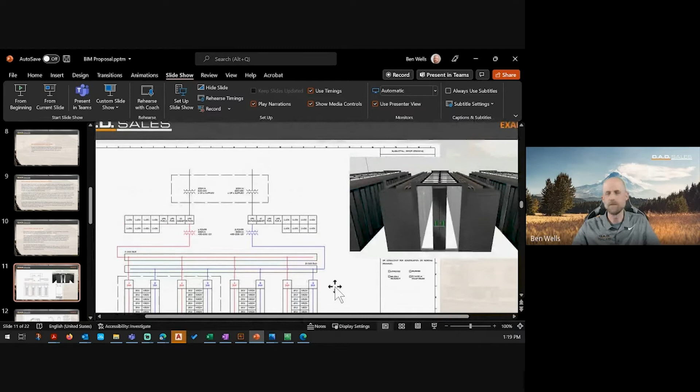This is for the University of Alberta. The University of Alberta came to the market and said, I want to migrate my data center, and I'm going to do a bunch of cool experiments, and I need a big data center with a lot of power, and I need it to be an uninterrupted power supply is what they're looking for.

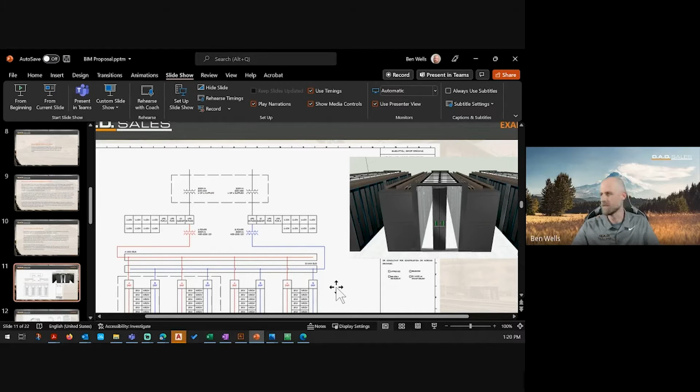Now this is an open tender. You can see that anywhere, and you can download the specs and look at where this stuff comes from if you're curious. I'd say that's pretty academic of you, but you could. Basically what they say is, here's what I want, give me some ideas.

So when we tackle this as a team, it's a big team working with IBM and APC and a bunch of guys to put this sort of thing together. Now, DAD Sales is the designer for APC in Alberta, so we do all their design work. We're sitting at the table as a designer on this job, hopefully a sales guy later, but that's my whole point: we start here to make the sales easy later. And so this is a redundant power supply design.

How do we do these things? How do we communicate these things? How do we put them into a proposal? And how do we do that in a way that doesn't cost us a fortune? We've maybe 5 guys on this job, maybe a day each, it's a week, and that's just to give the university some ideas. So it's something we want to make sure we do as cost effectively as possible.

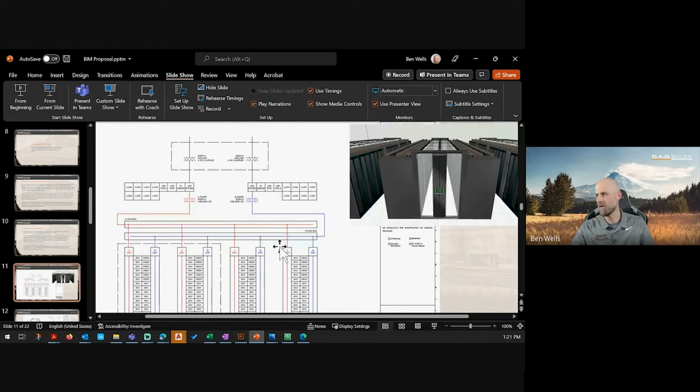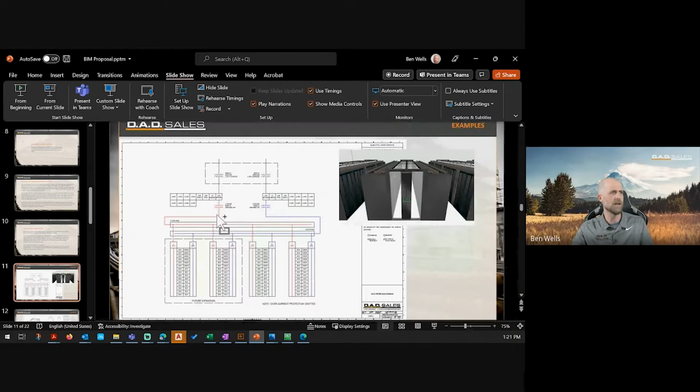So we're using tools like Revit, some online design tools, things like that. In the interest of tying a bunch of product together and communicating effectively, I drew this morning this topology layout to show how this stuff is going to get stuck together. It's the communication of that, in the case of the sales process, that allows us to do that in a cost-effective way and be clear.

So if you just want an idea, here's a really cool 3D layout. We just threw it in CAD, I think this is done in Revit. And then, you know, here's a visual idea of what you're going to buy. Because when you look at the bill of materials, it's 7 pages long and it has a terrifying price tag, I can't even get through it myself. So by communicating it in an effective way like this, we save time, we save money for everybody around.

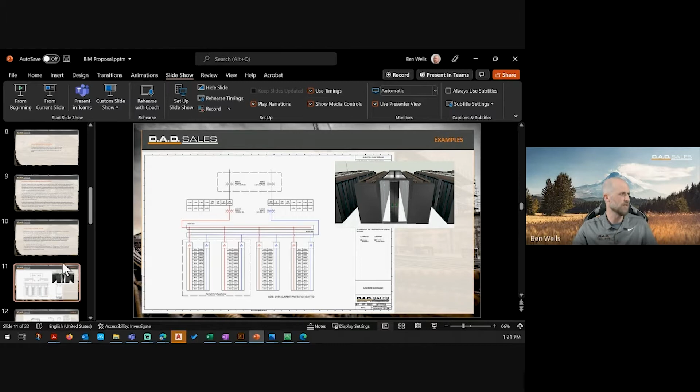Great example. So I'm a manufacturer, not an engineer, to be clear, that is not my role. My role is to sell stuff, I'm a sales guy. But here's a great example.

So this one is done for the City of Edmonton. The City of Edmonton said to my contractor, over my dead body are you going to stack a transformer, it's not going to happen. You better get an engineer in here and you better stamp up a drawing and show me on paper that this is going to work. So again, a picture's worth 1,000 words.

The engineer is not going to look at a strut catalog, he's not going to look at the deflection points or the weight distribution. The contractor is really on his own. So he could tackle this on his own, or he can come to a guy like me and say, hey Ben, you sell that stuff, can you help me understand how to apply it and calculate deflection? Can you give me only what I need to know? I don't want 5 catalogs and 2 white papers, all I want is 1 sheet of paper I can hand this guy in an email. So, this is our attempt at that.

And this is a good example, because to do this quickly, the fastest way is 3D. So you draw everything up in 3D, it's faster by far. I grab the manufacturer's 3D model, I'm in it, I'm going right away. I then do my quick calculation of deflection, put it in the notes, put it in one drawing, and send it off. The engineer came back with one question.

I'd like you to add 2 pieces of strut here and here for the rails. It has nothing to do with weight distribution, it has to do with something else. So there he goes, he's got his bill of materials, he's got it all in one sheet.

He knows what to buy. And you better believe, because my part numbers are listed in this drawing, I get that sale no matter what, 100%. Now, in this case, I don't make money selling a little bit of strut. What I do is I try to be helpful to guys. And so that guy says to me, hey, I know to call Ben whenever there's a problem.

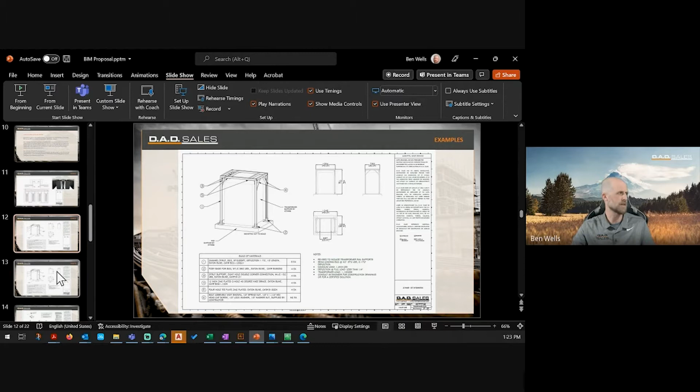He's my problem solver. I sell a lot of product because of it. So being technical, being more like a designer or consultant, will really allow you to be a sales guy. So you can be in sales without being like, let me sell you the Sham Wow, let me tell you why this thing is so great, I got the best rag in the business, let me tell you about it.

That's so boring. Anyway, sales can be tough, but a lot of sales now is this BIM. It's technical, it's being able to show that. So there's lots of guys looking for you in our space, and it's a fun way to sell product.

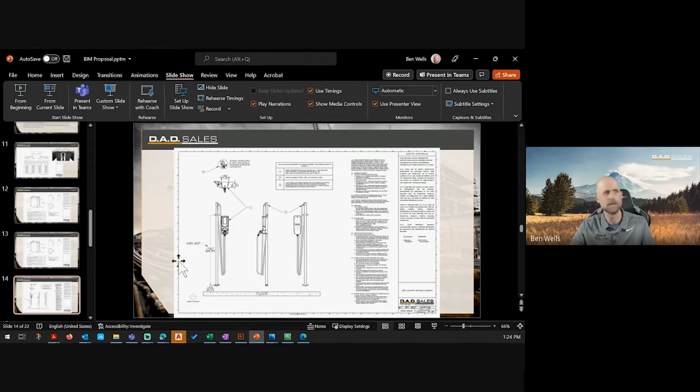So here's a good example. I sell this thing - this is a car charger. You know there's lots of car charging stuff going on, that's why we're in that space. But you'll see here, there's a charging head, here's a cable management bracket. So there's 2 parts there.

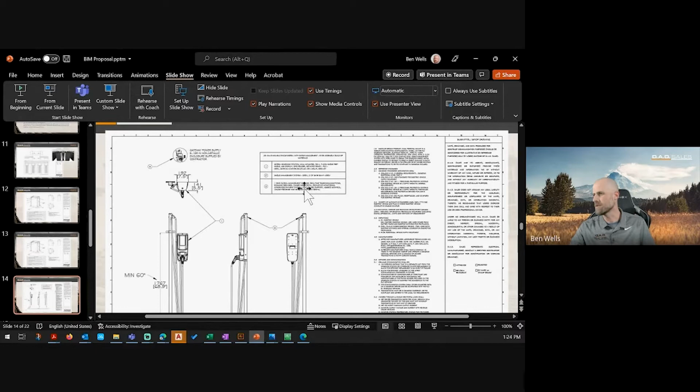There's a gateway, a little communication gateway, really easy to miss. In fact, it's not listed in any of our spec. If you would go look at a spec sheet for the Core Plus on FLO's site, you would not see this gateway in there - it wouldn't exist. And what do I get? Do I need networking? What does that cost? How does that work? There's so many questions that a consultant says to me, I don't care, just do it, I don't want to hear about it, but you're on the hook. And then they give me the spec. So I get to sell it just because I put this together.

So this drawing here has got a couple things I want to highlight. One is it's not typical to see on an engineering drawing a Made in Canada logo there. But what am I trying to communicate? I'm trying to quickly communicate that this is made in Canada, and with all the supply chain disruptions, Made in Canada is a very good thing.

I'm communicating. I don't over annotate - don't do that just because you think somebody might want to know something. The nice thing about a BIM model is that by putting this drawing to scale, they can figure anything they want out of it. I'm trying to communicate something right now.

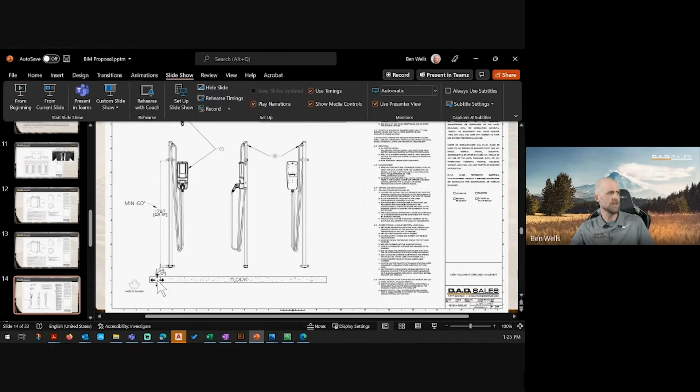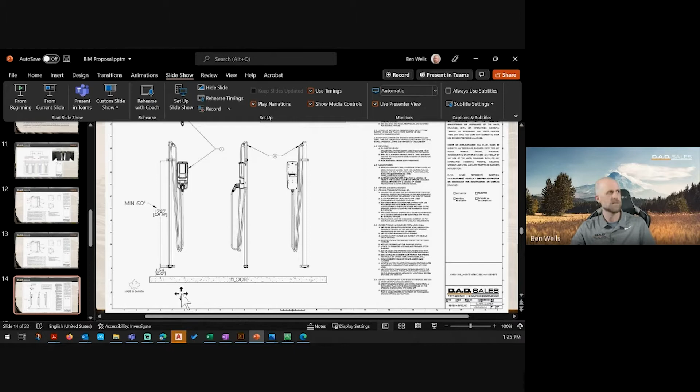I'm trying to show them some specific things, highlight specific things, as in, you need to mount this up so you want to get a mop under there, and if you don't have that 6 inches there, you're gonna be really frustrated trying to clean that. So it's such a small little detail, but by them looking at this, they go, okay, so I know that I need this to be a minimum of 60 inches for these 2 brackets, and I know that this needs to be 6 inches. So how do you screw it up? And that's what I'm aiming to do.

A little bit of annotation, but here's the big magic these days: the master specification, as I indicated - oh, this is blurry, I apologize - but the master specification is a great starting point for guys.

This is what they end up with though. They'll take out all the stuff. They say, no, you're not tricking me, Ben, I'm not putting that in there. I know that instantly hooks your product, and I'm not putting all the hooks in. I want this to be a competitive process.

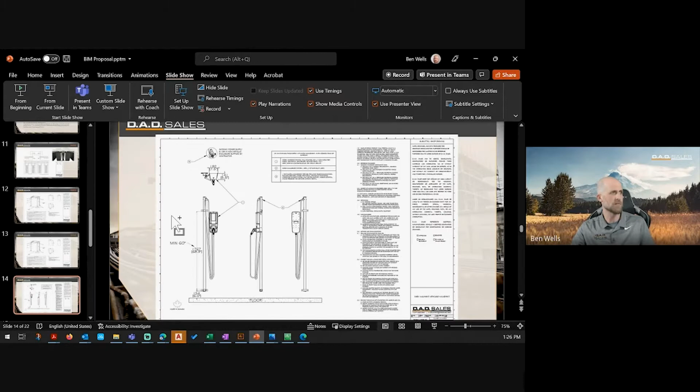What they'll often do though is they'll put like one notation on a drawing. They will not include a full written spec. They'll include this drawing, 100% they will. They'll say 'this or equivalent', but what they won't do is give me a full written specification.

So what I'm going to do now as a sales guy is say, see this basis of product design - I'm actually calling this product out by SKU now. I'm saying, here's the key features you would want to know, the distinguishable features. And I'm trying to be a little agnostic in it, so the engineer takes my spec as it's written and drops it right in.

Sometimes spec writing isn't about writing the best specification you could possibly write. It's about understanding your audience. So who is the contractor? Who's the electrician or engineer? How do they like to write specs? Do they like to write a master spec, like on a government job you'll see that? Do they like to put it in the notes and the details? Sometimes they'll give you the written specification in a drawing, like with a header.

So what I do is I kind of do both. I put it all in one drawing so they can copy it into CAD. I give them one piece of text that I think I'm going to get, and then I elaborate. I give them reference standards, standards on the type of connector, a couple definitions, and of course I throw in my approved manufacturers, and I'm cheeky. I say alternate manufacturers shall have a minimum of 10 years in the Canadian market and operate a Canadian national network with a minimum of 50,000 transactions a month across Canada.

So we're the only guys that can do that. That's why I have this in here. So this whole spec is loaded that way. But in all fairness, I'm still considering my audience, and I'm saying to them, do you understand why these things are important? If you don't feel value in that statement, then get rid of it. That doesn't matter. But I've limited it to the best.

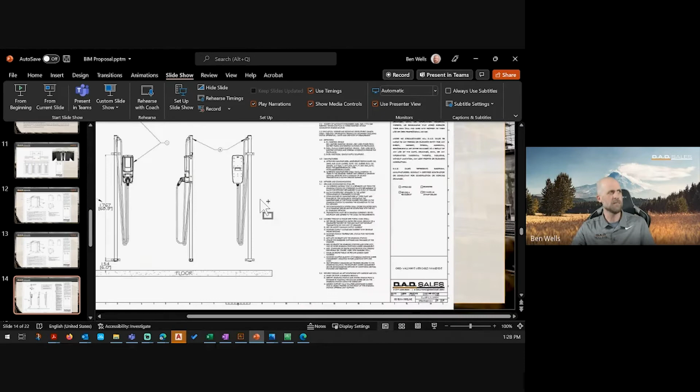So when they say network and communication, does anybody on this call know? Probably not. After having this document, you may not know what the other stations do, but you absolutely know what this station does, networking, what features it has. So again, BIM is that this is BIM. This is what BIM is. This is about being able to take what we know, communicate it effectively with a ton of information, and then be very specific to the project we're working on.

And there's a big confusion in that, because sometimes I supply BIM models and people say I'm doing BIM. No, 100% no. That's not what BIM is, right? I got a BIM model - I hate that. My manufacturers say that all the time. I got a BIM model. Oh, what does that mean to you? What does that mean to you?

At what level of detail? What is included in that? Are you giving texture mapping? Are you giving them a basic model? Or do you have the features? You know how many guys don't load the attributes into their models? Tons.

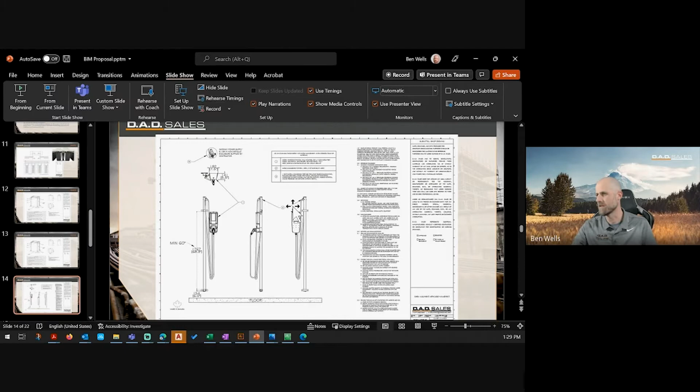So guys like me will take their 3D model in Revit. I'm going to add in my attributes. I'm going to design it around the model. I'm going to take out things that I know are not needed. I'm going to provide a clean model now to my partner. And in many cases, because I know exactly what they want, I'll provide them a full written specification as well. I want to give them the entire package in one email. And so that's one of the ways we do that.

I need your consent. Why? Because everything I sell today, guys, has an app, or it has something that we've got to have, a way to set up an account, right? Like every time you interact with another business, you get another login, right? Well, that's no different with us.

And the other thing that's important that guys may not realize is I'm doing my layouts and I'm going to do my design work. If I can give them the key things they need right at the time of procurement, that's when they start thinking about things, to be honest, about how does that look.

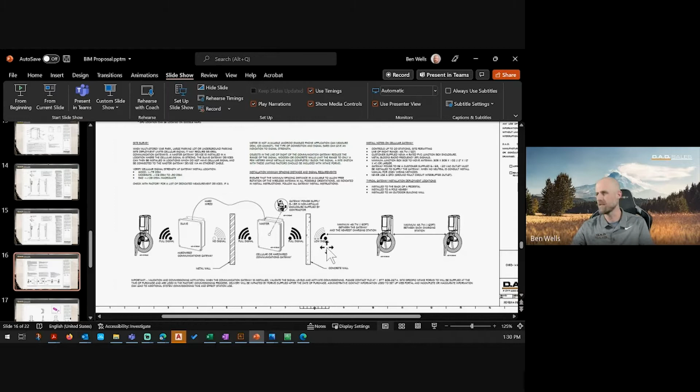So by giving them all this information at once, and then them signing off on their shop drawings with me, because I won't accept their PO if they do not, then I can send that to my manufacturer. And then when they go to commission this product, they have everything they need. It limits the back and forth.

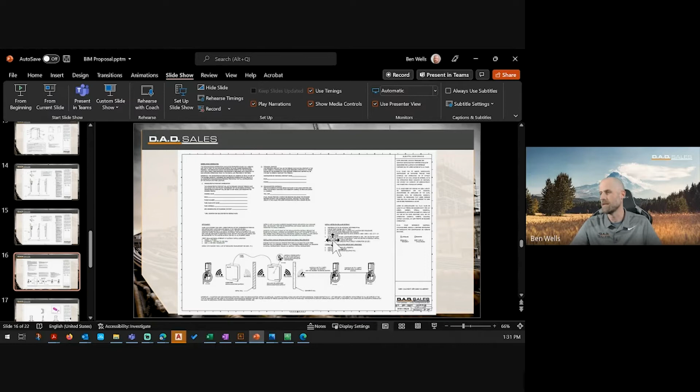And going back to what the BIM does, it's about communication, right? So if we can communicate effectively, then we reduce the back and forth, we increase profitability, and we increase how much work we can do and how frustrating our lives ultimately are. And that's why people buy stuff.

Here's a good one. Say to my manufacturer, hey guys, they don't want your pedestal. They want all this cable management stuff though, and they want to mount it on a wall. So the problem with that system is, as you can see here, I'll zoom in a bit. This little bracket, there's a pedestal that normally sits here. So this is now floating against the wall. It's not going to work.

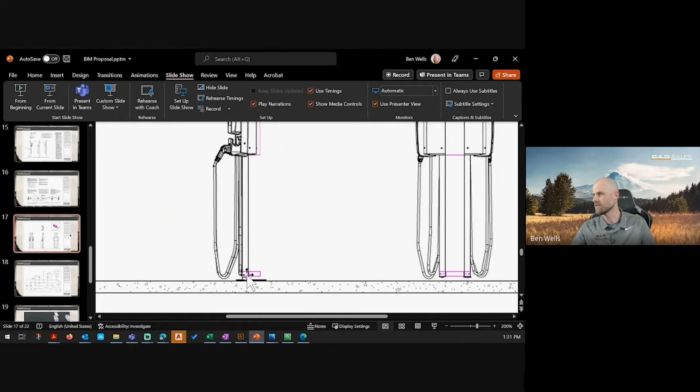So what I'm saying to my manufacturer is, I need you to get these standoffs done for me. So here's what I propose. I take the 3D model, I put it in, I measure right off the 3D model. I decide how big this needs to be. It's 6 by 6 by 18. I go out in the world and I find this product because I don't want to build it. If I can find a product like this, then I'll go find it.

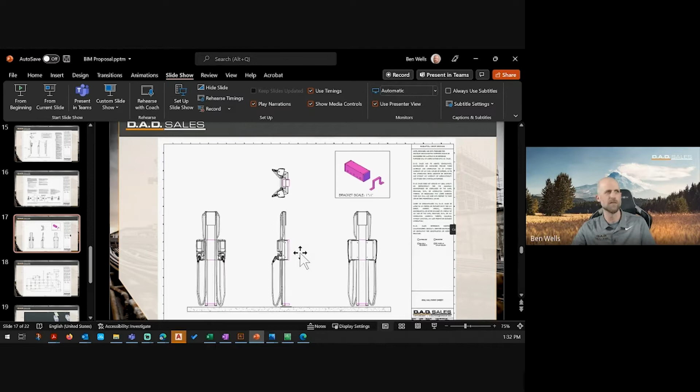So here we go. I got this little bracket that could pretty much be made anywhere, and I've incorporated it into the drawing. And what I'm saying here is this is not standard, that's why it's magenta, I'm highlighting it. I'm bringing a lot of focus and attention to it. So that gives you a little bit of an idea how I would do something like that.

Here's another one. I got a team of sales guys, right? We got 18 bodies in our company, they're constantly running around, and they ask me the same questions over and over. Oh, this is blurry, that's nice.

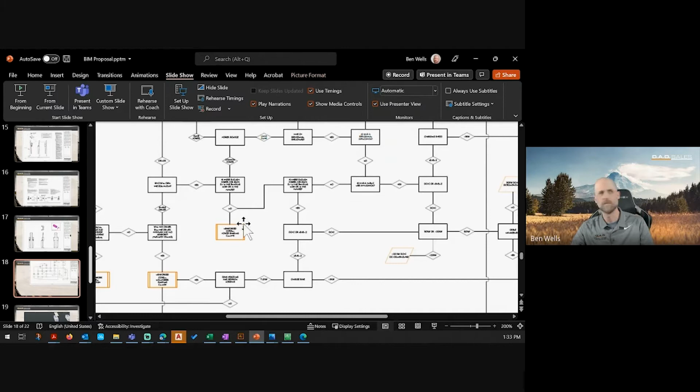So what I do sometimes is I'll create like a flow, F-L-O-W in this case, not flow like my line. But in this case, I say start here, and then I start asking questions like I would if I was just talking to a human being, and I just keep exhausting them. Is this a residential application? Is this a commercial application? If it's a residential application, go here, ask another question, and then take the path. And at the end of it all, it'll start to select the product. Pick this product in this configuration. Okay, so this is another way that we will take that approach.

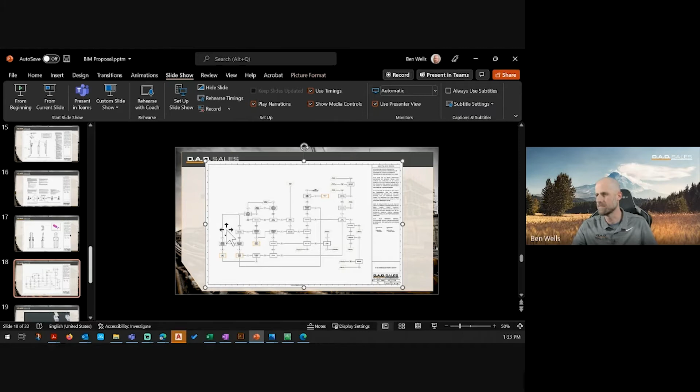That philosophy, that BIM philosophy of communicating information, do it in such a way that one sheet is better than a 20-page written document, right? This is a 20-page written document, like how to specify, broken into one page. So sometimes it's all about how can I communicate that in a visual way, and this is a visual way. But how can I communicate all the rules and the ifs, thens, without giving them something like this? Otherwise, you got to become an expert, you got to learn more. So it's a very handy way to do it.

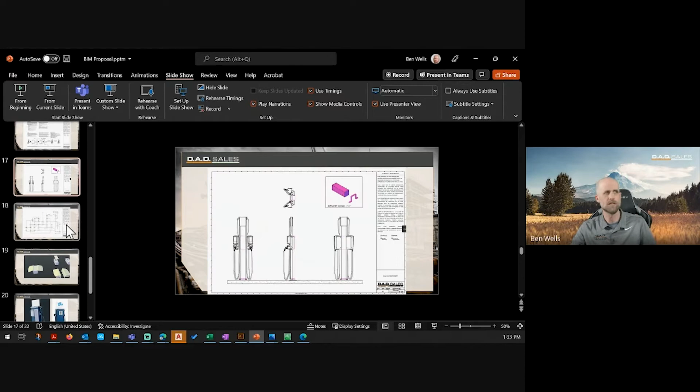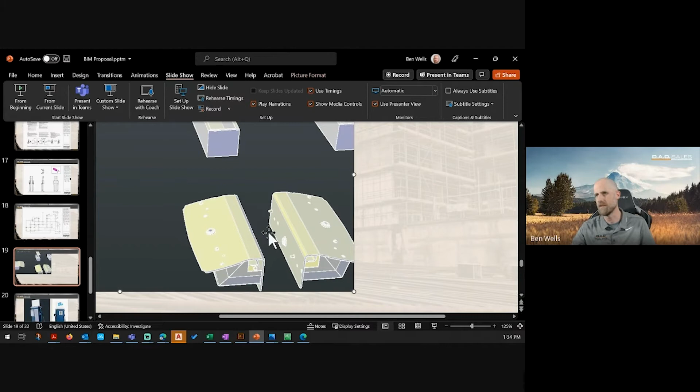So not only am I communicating to my customer right now, and I could do this a lot of ways - I could napkin sketch it, a handful of ways. But this way, the next logical step in the construction process is that this model is used in construction now. They can take that model and go right into construction, so we're not having to go back to a redesign phase. It's already done.

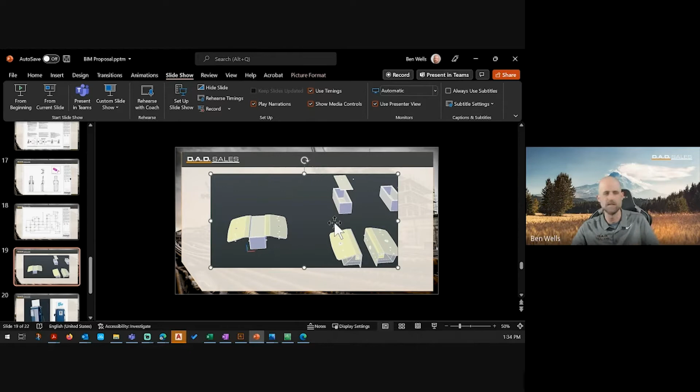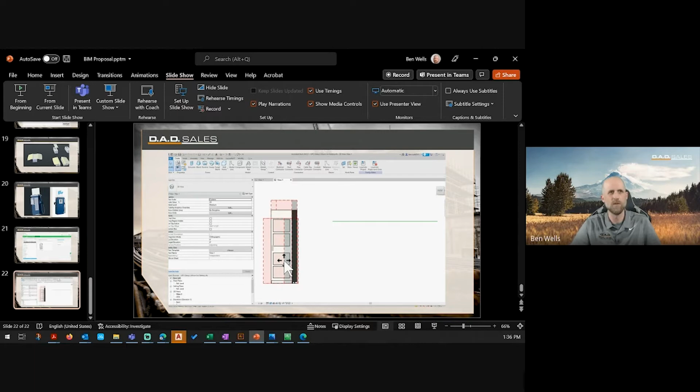And this is one I'm working on right now - that's that same U of A job. And this is another tool, not Revit, okay, so I use both. This tool is going to allow me to do a really quick design - I can do this thing in about 20 minutes to half an hour and design an entire data center start to finish.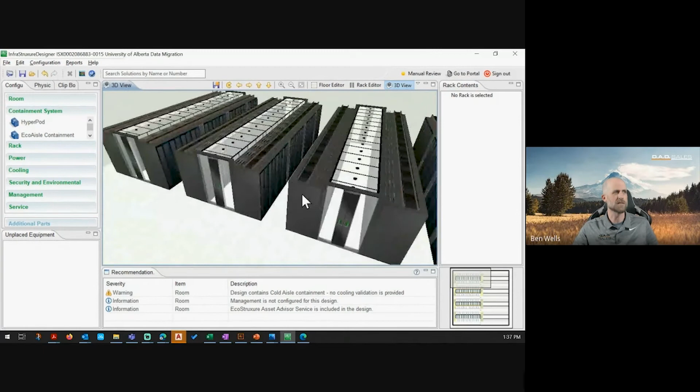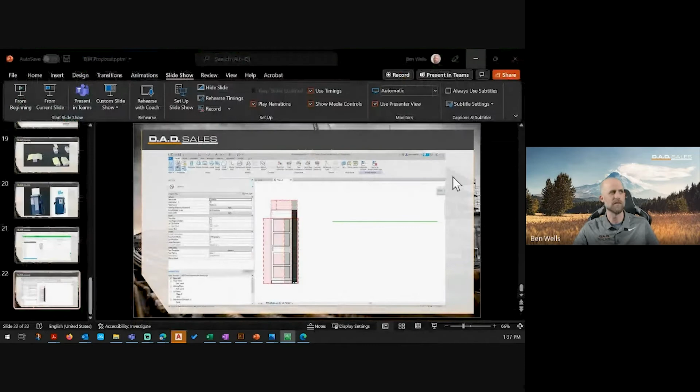And now when I'm showing a customer - because this is 4 pages of materials, as I mentioned earlier - now I can look at every little thing. I can go into my rack editor and say, you know what, I'm going to configure this rack and put these SKUs in it. So when I'm done, it gathers up all my SKUs and off to the races we go. Then once I get into my design tool, I can download all the Revit files and do something more like this. So either way, there's about a million ways to skin that cat.

The right answer is, who is my audience and how do they want this information? And I think that's what BIM does so very well. And so that's really all I had for you guys. I didn't want to get into more than some examples, but I ended up doing that. So thank you - do you guys have any thoughts or questions?

Really interesting, Ben, thank you for bringing that. I think you're the first one touching on the area of sales, linking with BIM. That's why I understand why you chose this program. I remember when we met doing the technical communication, you mentioned this topic, and it was really interesting. We've always been focused on design and creating the model, but seeing it from the sales perspective is really interesting.

Yeah, so the gap is closed, you know what I mean? I think there's a gap that's always existed between, you could be a sales guy if you're really personable, or you could be an engineer. But really what's happened is there's so much more communication being done.

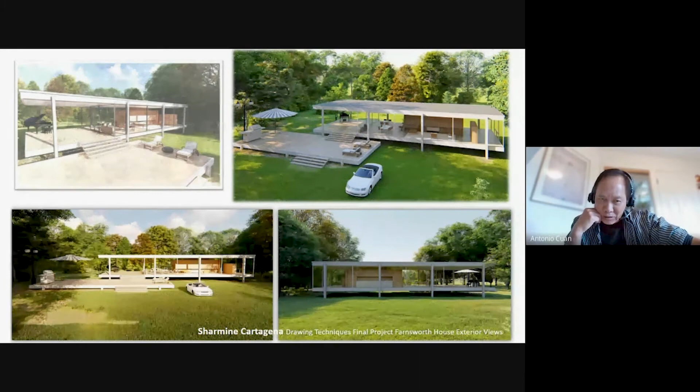We're going to start by showing the final project in drawing technique. Sharmine, by the way, just graduated this week, and she used Twinmotion, a software that lets you do rendering really fast. I try to encourage that. It's not in the curriculum yet, but we are going to adopt it in the future, definitely. You can see the kind of resolution we have in our 10.1 project drawing technique.

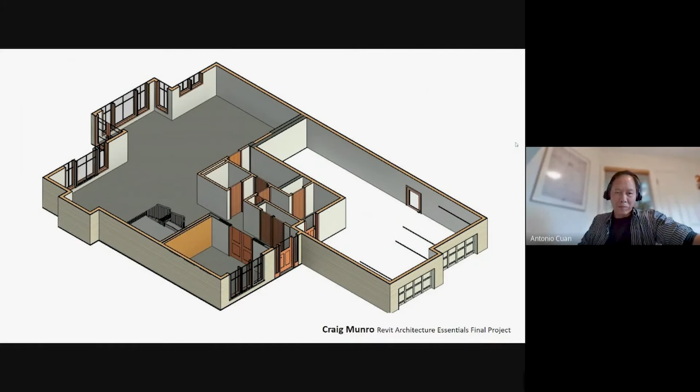Here's a project that we worked on in Revit, the Summerlee house. I'm sure many of you are familiar with it and its different challenges and features. This was done by Craig, not at the completed stage, but at a stage where it's nearly completed.

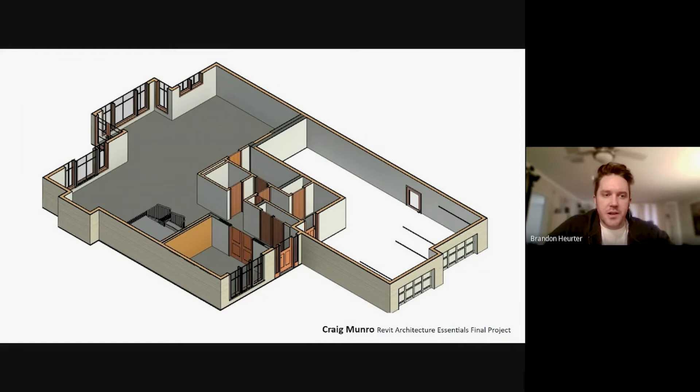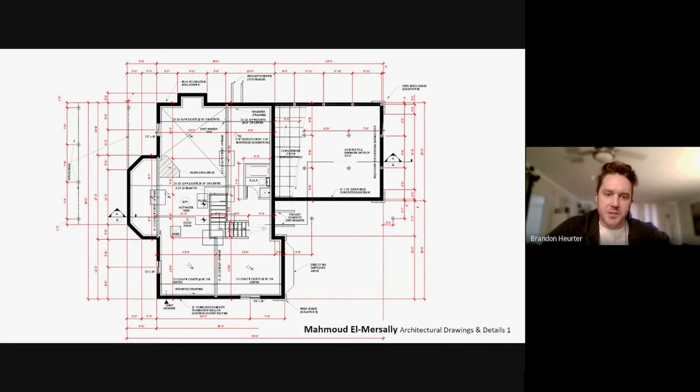Here's a floor plan for the project in architectural drawing and details. I'm sure most of you, if you're at this point or graduating, are familiar with this. This was really nicely done. You can see that when he printed it, he included the dimensions in red to add some contrast and show importance. So this was really well done. Basement, main floor here, and yeah, lots of nice work.

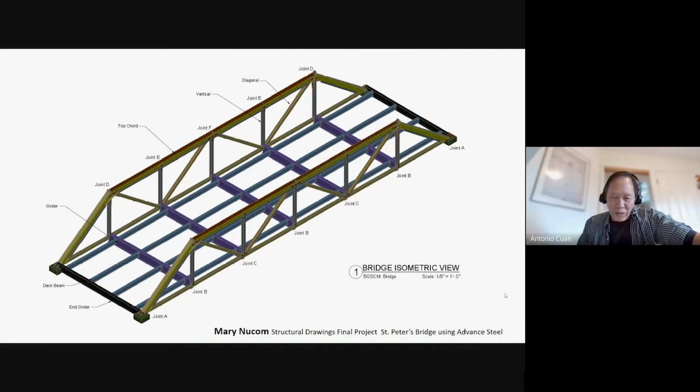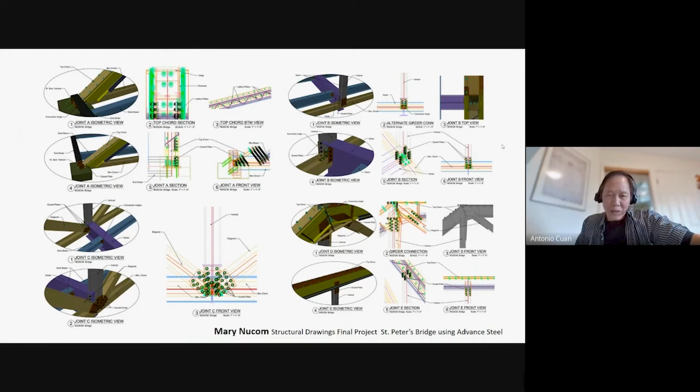Mary Nucom developed this final project in structural drawing, and even though we're not touching that kind of course this term, she has the flexibility to do her own scale. What's interesting here is that she used software on an AutoCAD platform called Advance Steel. It's amazing, her achievement. You can see all the detail and efficiency that has been done is amazing.

For that reason, we give the certificate of positive attitude to Mary Nucom. Mary, I think you have been outstanding. I want to highlight that you are, like others, a full-time worker and mother of three, so this implies a lot of sacrifice. I think your attitude, your discipline, your attention to detail, and taking on a challenge - because I mentioned, why not try this kind of software - and you did it, and you did excellent. Congratulations for this certification.

With Mary being in the engineering program, I didn't get to spend too much time with her, but the time we did spend communicating together, you really get the positive attitude vibe from her. As Antonio mentioned, she's working full time, still maintaining her studies and still maintaining a high standard for all her work. So the award is well deserved.

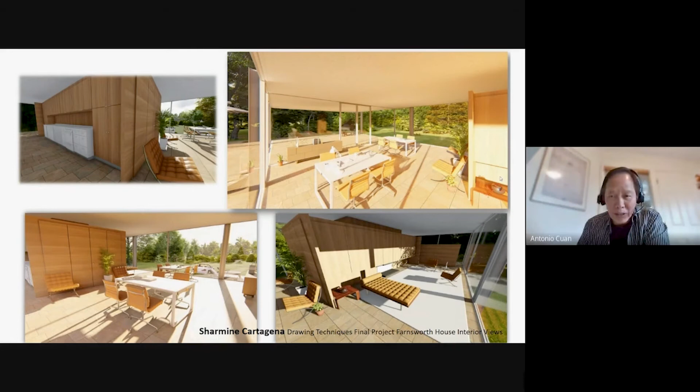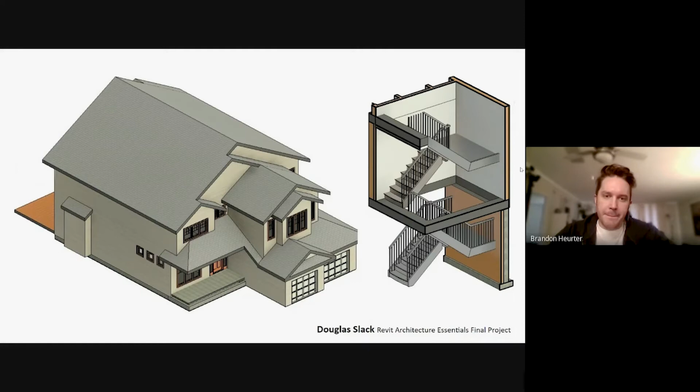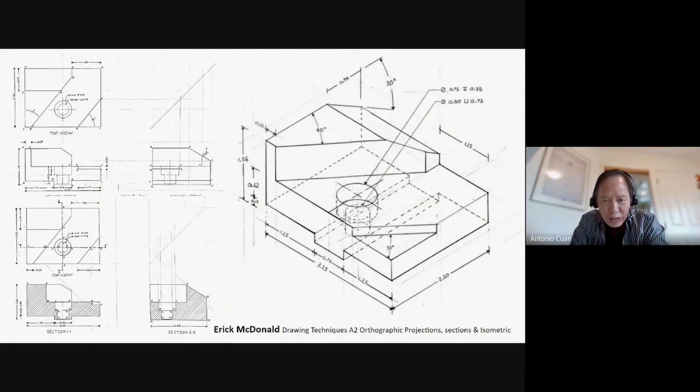This is an example of assignment number 2 in drawing technique - orthographic view, section, and isometric, done by Erick McDonald. And Gaetan, he developed this example of the auxiliary view.

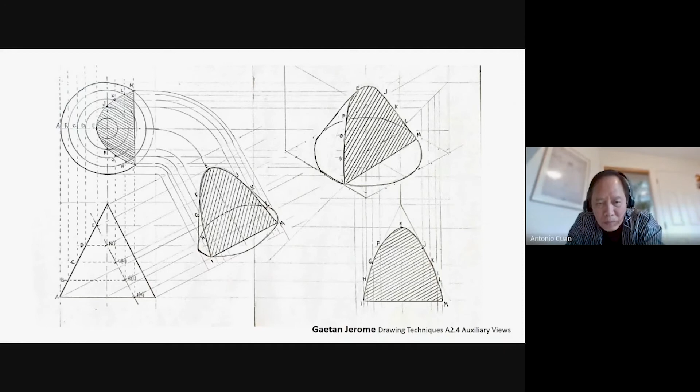We are going to give the achievement of positive attitude to Gaetan Jerome. Gaetan comes to us as a former real estate agent, wanting to dive into the technical aspect. I've had a few interactions with Gaetan over the past term in the Civil 3D course, and he started working on Civil 3D, which is really technical software, as most of you are aware. He dove into that, going from zero to a hundred in a short period of time - a matter of six weeks - and he really enjoyed it and maintained a positive attitude about it. He was able to understand what he wanted to get out of it, and that's why we present this award to Gaetan.

I'd like to add, Gaetan is missing this activity, he's in another one, but if I want to say there is one person in the whole course that has this kind of attitude, it's Gaetan. In any kind of lab, we have his presence, and it was a pleasure to share all this kind of activity with him.

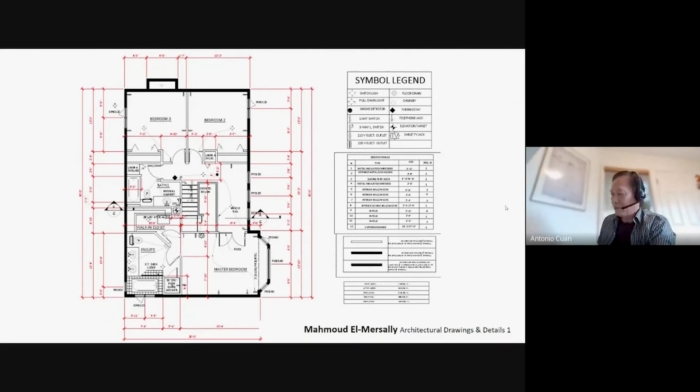It's the upper floor plan done by Mahmoud, who's going to be graduating quite soon. Really high level of detail and good quality work from Mahmoud.

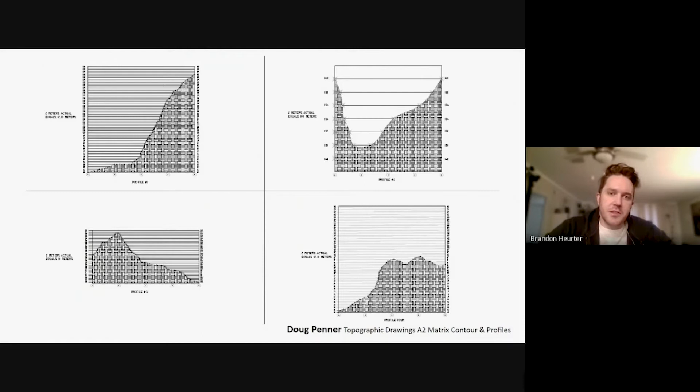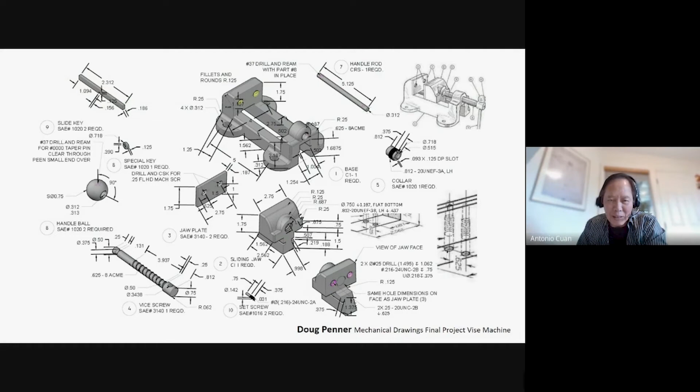So the final project from Doug, we are developing a vise machine, and then the kind of detail for assembly, and we had to build that. Everything has been done in AutoCAD.

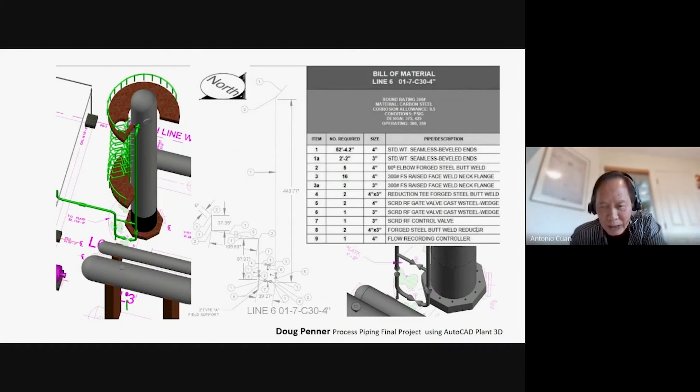And then the final project from process piping, that's also a course from Doug. I select his works. So this is the plan view with all the equipment. And then one of the pages showing all the information that you need for the piping projects - 3D isometrics, and then the specification in a bill of material.

So this certificate of achievement for leadership is given to Doug Penner. I think that's almost finishing Doug in the engineering program, and I believe you've achieved excellent results. Your tenacity and discipline is at a high level, and I always see that you are taking on challenges, always trying to do new things, and experimenting with new software. You are a really great listener and constant learner. So congratulations for this, Doug.

Yeah, I agree with what Antonio said. When Doug came to us, he was a quick learner and not afraid to get his hands dirty, always working with high level of commitment and dedication. He's not afraid to ask questions, and he's just constantly pushing the boundary. For that reason, you deserve this award.

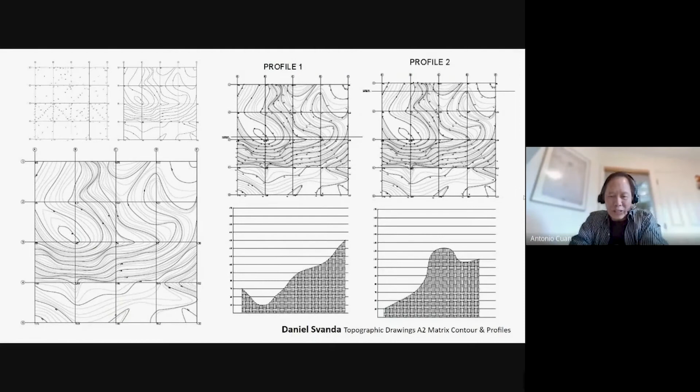Yeah, congratulations. Awesome. So, Daniel, that's one. Go ahead, Bram. Okay, so this is from topography, the topographic drawings and details.

This was similar to what we saw from Doug earlier. They start with a data set and have to plot points. From the points, they create contours. From the contours, they create profiles of the site. So you can see the progression from going from simple data set points to contour lines, further interval contour lines every 2 meters, and then setting up profiles and actually showing those profiles on a graph, giving us an idea about the topographic features of this site.

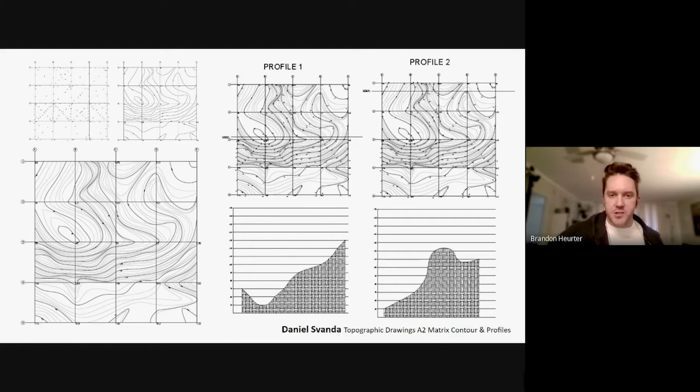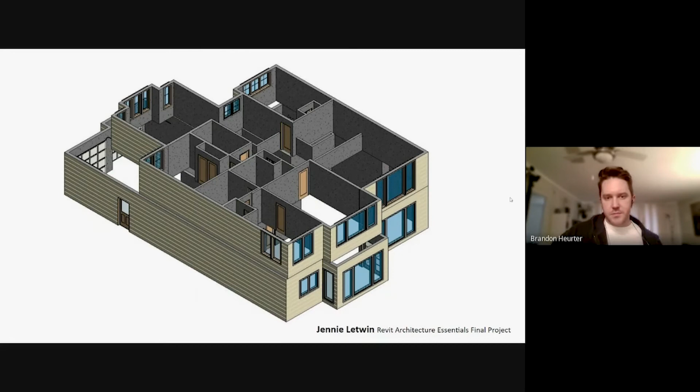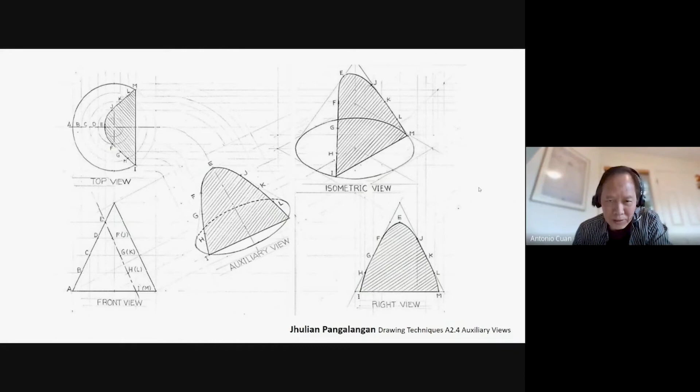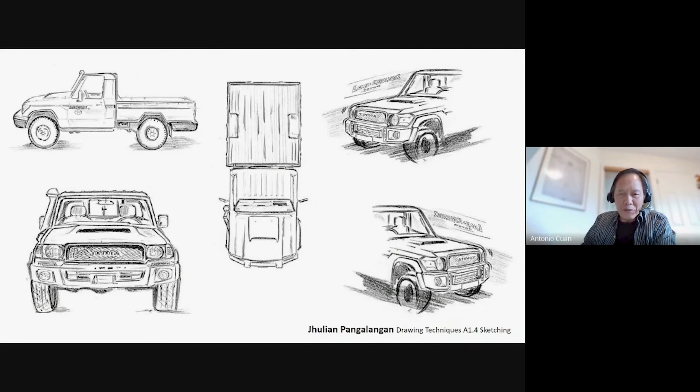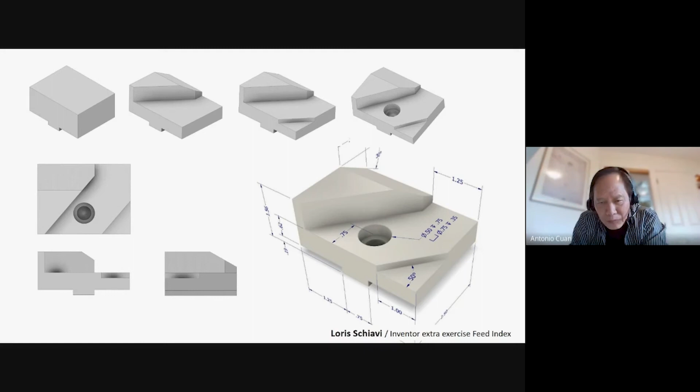Another one from Jhulian, and he has the sketching, number 4 activity from assignment number 1. And Loris, he created this in Inventor. This is something that we have been trying to incorporate, the kind of assignment that we would love to have inside of the course. We did it as an experiment, and he developed the whole process, indicating the kind of technique and command that they're using. So it was an excellent work.

So the certification for achievement and leadership will be for Loris. I think - go ahead, Bram.

Oh, okay. So Loris, I haven't had a lot of interaction with him. He's still in the early stages of the program, but the interactions I have had with him have been quite positive. A couple of people here have also said that in the room, he's like a motivational speaker - he can really get you going for the day because of his positivity and his outlook, and he comes to us with a wealth of knowledge in the industry. So for that reason, he's always pushing forward, and I feel he deserves leadership.

Yeah, I think that he's a leader, so we enjoy a lot all his work. He has been for more than 20 years working in the structure field. And then having this kind of information shared, like Ben, he did it, so it's amazing - the opportunity for those who are older, just starting in this field, to see the kind of implication that BIM could have on his work. And for Ben, this is his goal: to try to incorporate the conceptualization of BIM into the whole industry of oil and gas.

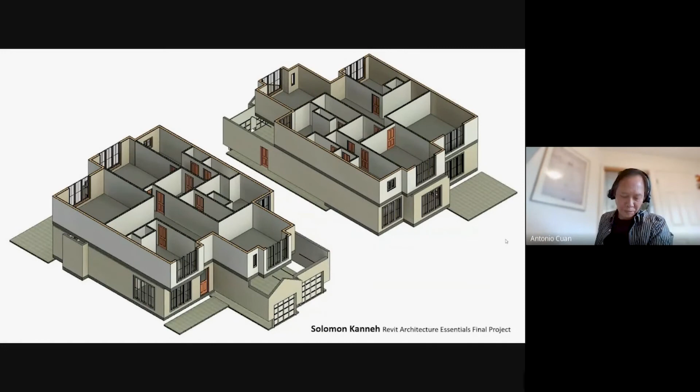Here we have a couple pictures of the Revit assignment, completed by Solomon. So here I did a couple horizontal sections showing the interior, the structure. This model is near completion.

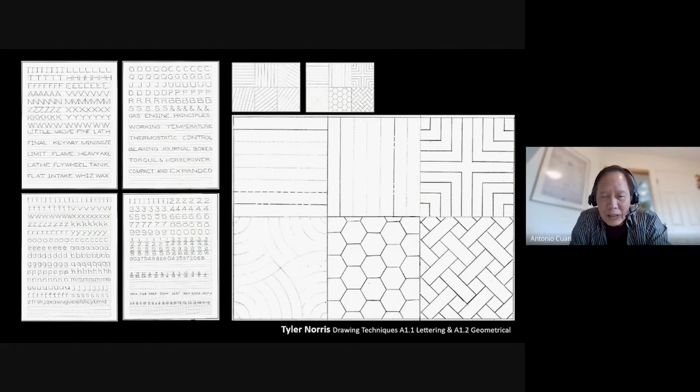In drawing technique, we start just browsing the ABC of this kind of visual communication. So you can see the example of the lettering, and then the activity using drafting, done by Tyler Norris.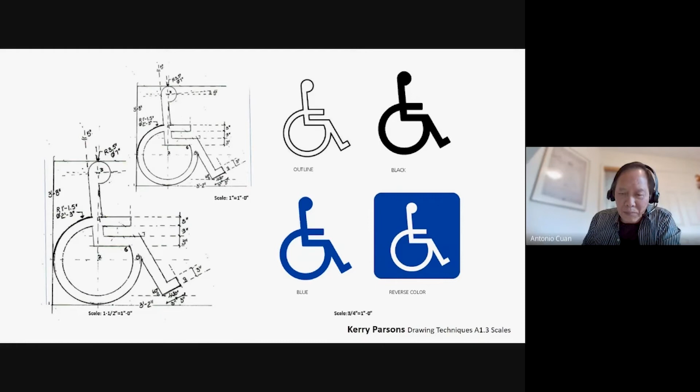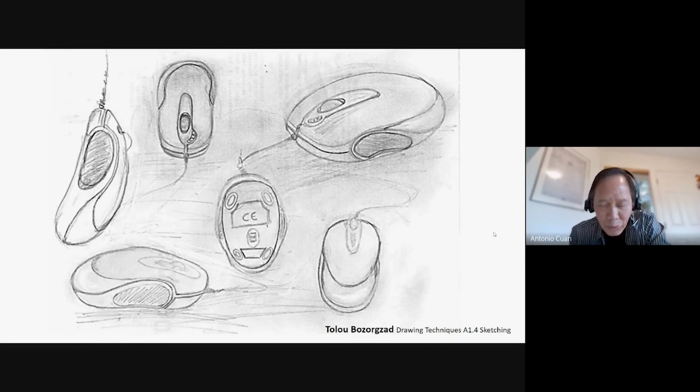And then the third task for this module is the scale, one of the most difficult concepts to be integrated in our field, done by Kerry Parsons. So Tolou did this as the sketching part, and then we complete the task. So the certificate of achievement for dedication goes to Kerry Parsons.

I would like to mention that we have so many students working full time, and this implies that they had to work after hours. Kerry is one such case, and I see this kind of dedication. She's early in the morning, always with me, and we try to exchange no matter what kind of problem. We have very good communication, and I always place the math issue, and she tries to understand, search and find a way to comprehend that kind of problem. This is an excellent example of dedication. Congratulations, Kerry. Congratulations, Kerry.

I haven't had any interactions with Kerry yet, but I assume in the future we will. So I look forward to that.

On Monday, July the 4th, we are going to have her. So be patient.

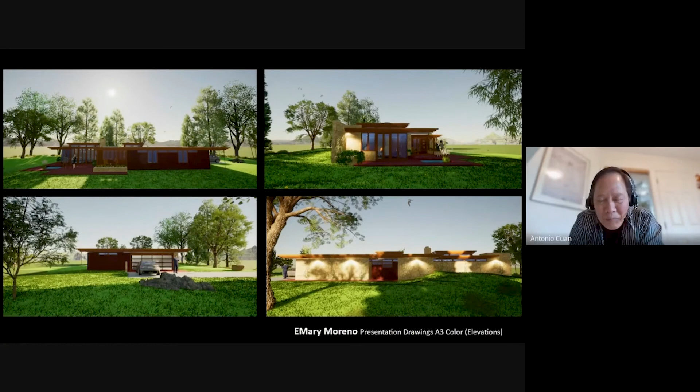This is an example from EMary, assignment number 3, using color in the presentation drawing. I try to have each student take their own projects and start manipulating. This is an example in term 3 and 4 of the application of Twinmotion, a really powerful rendering project, and she did a very good job learning and applying it.

So the certificate of achievement for dedication goes to EMary. Go ahead, Brandon.

Emery is in the architectural program. She's working with myself as well as Antonio. Whether it comes to graphics or plans or even just the presentation of data on a page, she always has high standards and is always dedicated to her work, looking to improve it. So that's why we feel you are deserving of this award, EMary.

Like Kerry, EMary is also working full time, but she dedicates a lot of time to the work. Congratulations for this achievement, EMary.

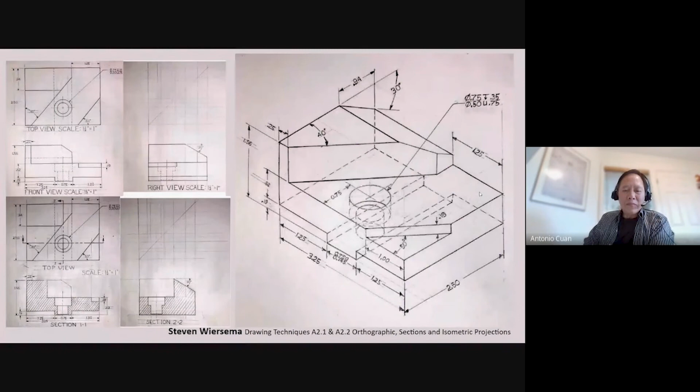So this is an example of assignment number 2, where we develop orthographic view, section isometrics. This is done by Steven Wiersema.

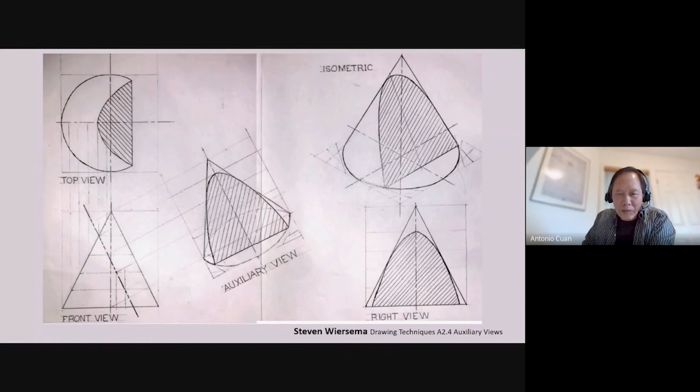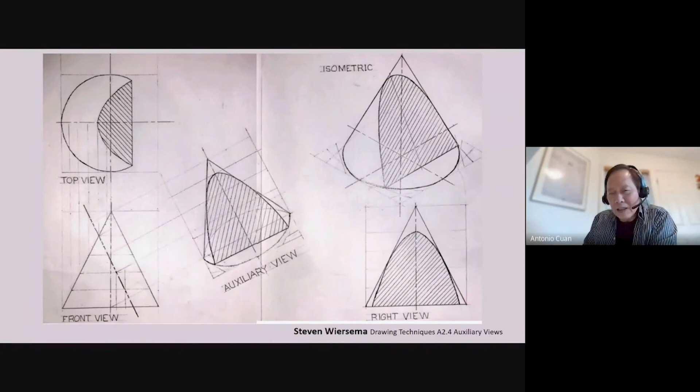Another example, completing assignment number 2 with the auxiliary view. Very good, everything has been scanned with his cell phone. This is a limitation since we don't have a printer and scanner, so everyone has to solve this problem. He found an app that they can capture with. It was very good, but you can notice the quality.

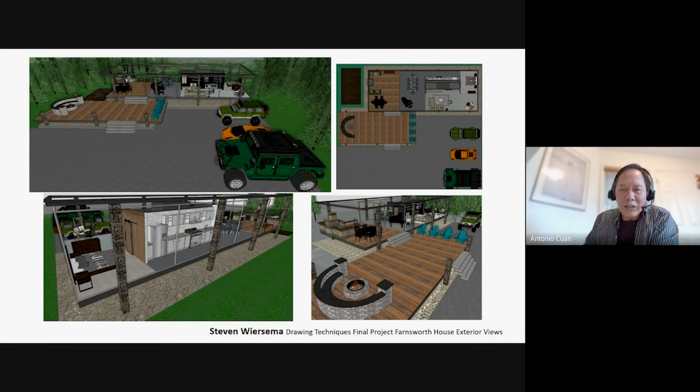So the award of excellence I'm going to give to Steven Wiersema. I'd like to add that like others coming with experience, this is the case, but it's really interesting that he can apply his experience, practice and knowledge, helping each other. I noticed that this is a great teaching skill that you have, Steven. I see that you pick up immediately what the point is and explain it really clearly. We really appreciate you staying with us, and you are definitely an asset and a blessing for having you with us. Congratulations, Steven.

I haven't had much interaction with Steven, but Antonio says he's a good guy, so I have to go with that. Congratulations. Yeah, congratulations. Oh, thanks.

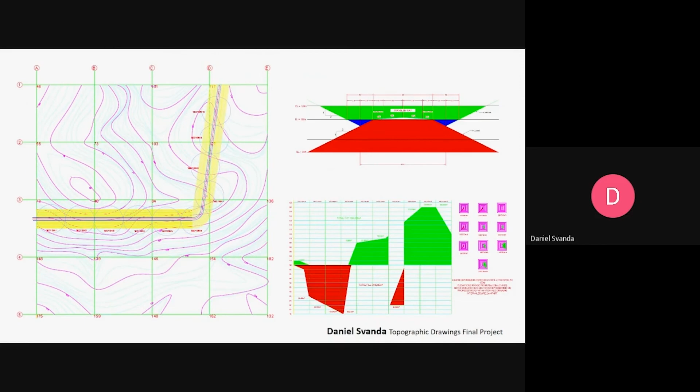I was like, wow, what is this? This looks good, it was a surprise. Really fun, it's a nice surprise. Yeah, really well done.

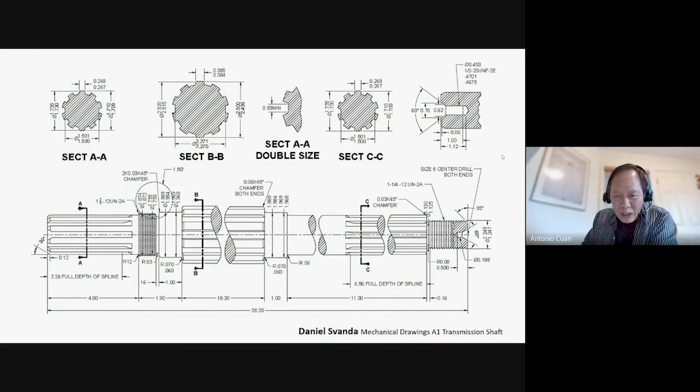Okay, so this is another work from Daniel, mechanical drawing. The first activity is the transmission shaft, and he did a very good job here. I forgot to add the 3D, but the quality of the drawing is outstanding, very well done.

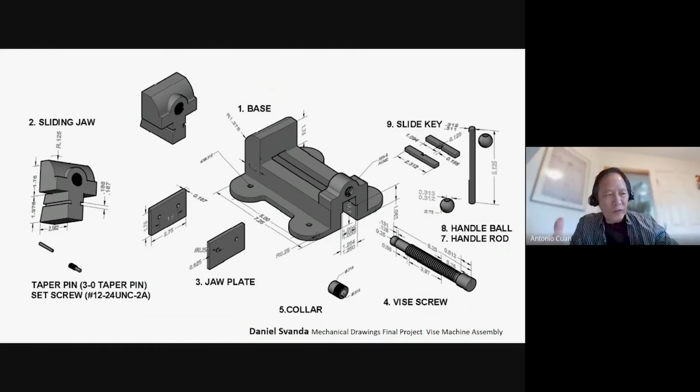So this is the final project, vise machine, and then we are going to have all this component and then the 3D. Very good job. So another one from Daniel.

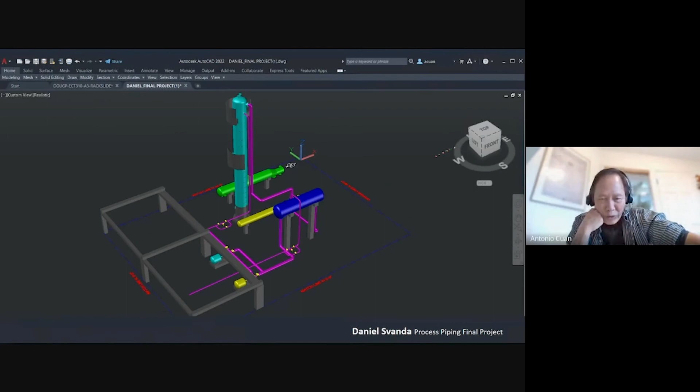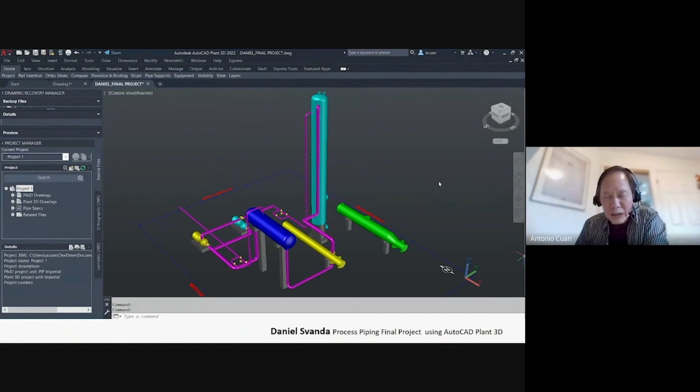This one was done using AutoCAD, but I tried to push and implement the AutoCAD Plant 3D, so this is an example of integrating this kind of software, importing from AutoCAD. It's really interesting, the experience, and we're collecting this information to, in the future, apply that officially in our curriculum.

So the project had to have all that information for each line. You can see that you have the 3D, the isometric, and then all the specifications, so the bill of material. This was done, but doing that in AutoCAD and doing that from AutoCAD Plant 3D is a completely different approach.

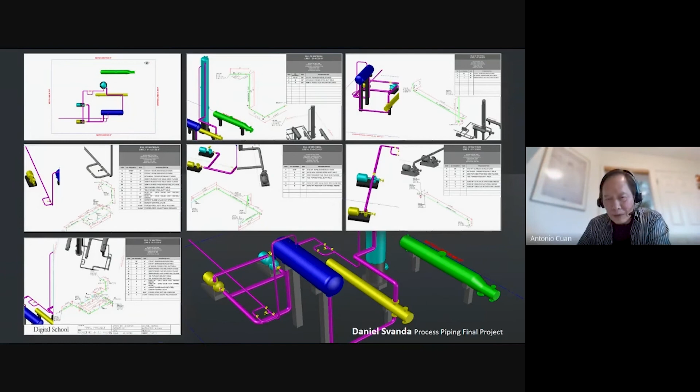So the award of outstanding achievement was given to Daniel. Go ahead, Brian. So this is the first time we've issued this award, and we figured it was warranted given the case.

When Daniel came to us, he had more of a hands-on background. He got into the software and just blew through the course at lightning speed, and kind of surprised us all. So we figured he was deserving of this outstanding achievement because he not only met the deadline, he finished the course before his deadline. So we figured that was deserving of outstanding achievement, really.

Just to add some figures, when you are taking the 1 year program, that means 52 weeks, and Daniel did it in 41 weeks, if I don't make a mistake, Daniel. So 40 weeks, I finished it. Wow, so 40 weeks. Oh, 40, so we missed by 1 week. Well, so it is a lot, sir.

I don't know how you did it. You're showing this kind of multitask organization and discipline, because you never missed one class. This is really outstanding, so congratulations, sir. Thanks, guys.